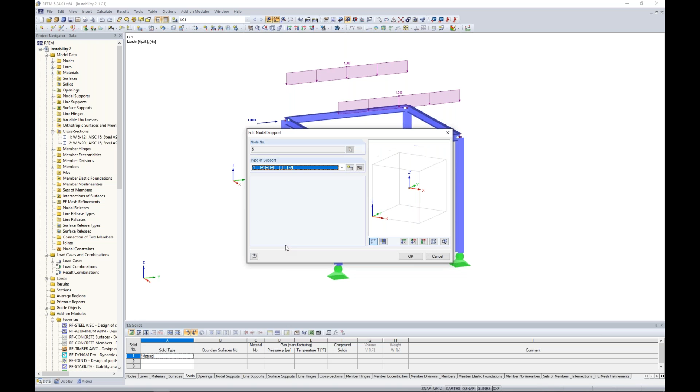You'll see down here at the bottom, we have these nodal supports. So these pin type supports are defined here within this dialog box, and you can see we have 6 degrees of freedom, 3 in translation, 3 in rotation. Now notice for this pin support, I restrained the translation according to the global X, Y, and Z axes, which we can see these axes here. But I've also restrained the rotation about the global Z axis, so this just doesn't allow that column to freely rotate about its own axis for torsion, for example. So we restrain that here as well.

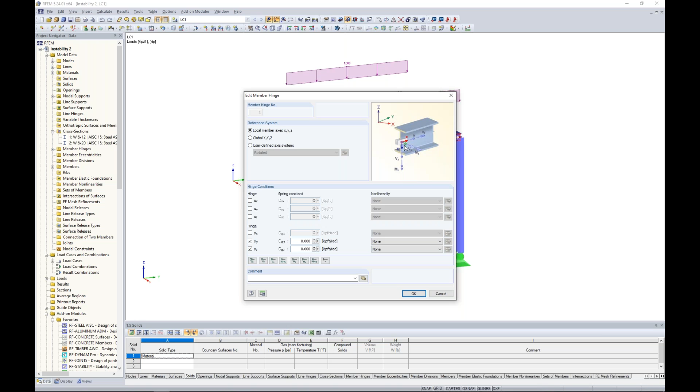Now, when I look at my beams at the top here, you'll notice that these are just typical beam type structures, but they are defined with a member hinge. As you'll notice here, I have released the rotation about the local Y and Z axes, denoted by lowercase x, y, and z, and we can relate it to this picture. But I have not released rotation about that local X axis, so that's going to prevent this member from freely rotating about its own axis with this pin member end release. Taking a look at our simple loads that we've applied, distributed loads up here on my front and rear beam, and then a couple of point loads to essentially apply a lateral load to this structure.

So this is under a particular load case here, and when we go to run this load case according to just a simple linear analysis, we're presented here with our first instability. I'd like to encourage you that when instabilities occur, especially within RFEM, really read this text that's given to you. We really do our best to point you in the direction the instability can be resolved.

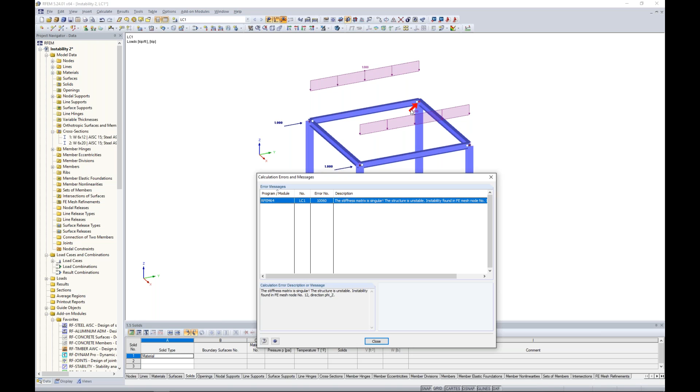So when we read this, we see that the structure is unstable. The instability is found in FE mesh node number 12. If I drag this down, we can see that red arrow kind of pointing to where that instability could potentially occur. Not always will this red arrow be helpful in troubleshooting exactly where the issue is, but often it can be used. And the instability is occurring in direction phi z.

So this is rotation about my global z axis. I can close out of this dialog box, and we might be thinking, okay, well, we've restrained these pinned supports down here to restrain the rotation about the global z-axis, so that couldn't be an issue. My member end releases are defined okay. So we might be thinking to ourselves, okay, well, maybe there's a modeling issue.

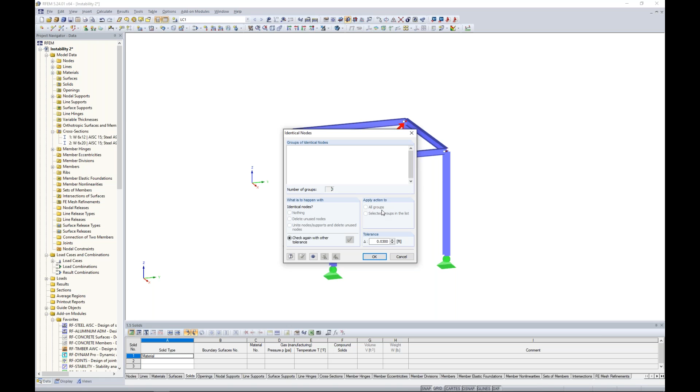Under tools, we can go to model check, and you'll notice we have a few features here to help us troubleshoot potential modeling issues such as identical nodes, overlapping members. If we take a look at identical nodes, we can set a tolerance and the program will actually list the groups of identical nodes here. But you can see for today's example, that's really not an issue.

So if I've exhausted all of my possibilities trying to troubleshoot just graphically looking at the model, this is where we want to utilize our add-on module RF Stability. Over in the left, the project navigator, I can launch this add-on module. What this allows me to do is to run a general eigenvalue analysis on this structure for general stability design. And I'm going to specify the lowest number of eigenvalues: 4.

That's just the default. Now, the eigenvalue analysis is linear by default, but we also can run a nonlinear analysis if we choose to. But here's the problem. When we try and import the axial forces here from load case number 1, and we click calculate, the program gives us a warning saying that the results are not available. The reason why is because we cannot run a general static analysis in RFEM with this load case. So there's no way that we can run an eigenvalue analysis here.

Well, this is where we would want to activate this checkbox down at the bottom where we can determine the eigenvector for an unstable model so the cause of the instability can be checked graphically. Notice this is now grayed out. We're not utilizing this load case or combination. So now when I click calculate, we're presented with these results tables, eigenvectors by node and eigenvectors by member. But really what's most helpful is if we just immediately jump to the graphics view.

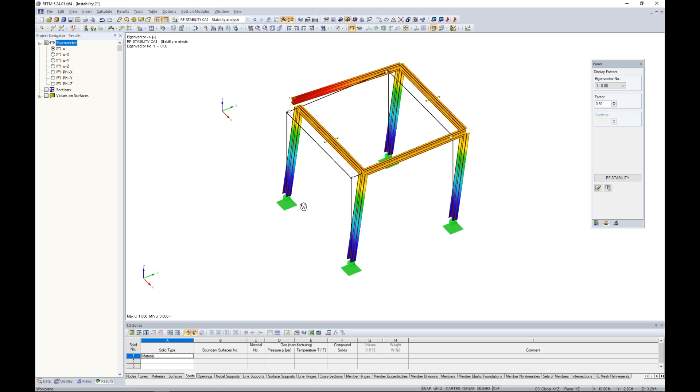And these are going to be my results from RF Stability, running that unstable model. Maybe I turn this to wireframe view here. And when I rotate the model around, I think we can clearly see what the issue is. I can even show animation here of RF Stability. We see that this member is not connected to the rest of the structure, so it's free to move about that global z-axis.

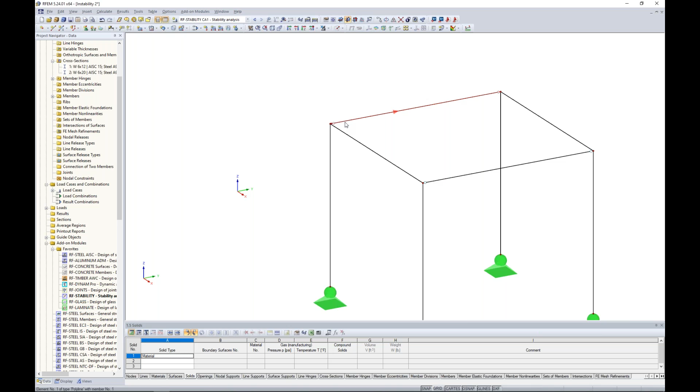So what we'll do is to turn off the results here. And if we zoom in quite a bit, well, sure enough, these two nodes aren't connected. And we might be asking ourselves, well, at what point is the program going to automatically mesh these two node points together? And that does exist within the model. Under Calculate FE Mesh Settings, there's an epsilon value here.

And this epsilon value, if we go to full precision, is set at something pretty small, 0.003 feet. So this is the default setting, and you certainly can increase this, but you really need to be careful because if you set this to something too big, you're going to begin to merge nodes together during the calculation that really aren't meant to be merged. So we'll leave this as default because clearly this distance is much greater than 0.003 feet, and all we need to do here is just grab this node and snap it to that column.

Okay, so hopefully we've alleviated this instability. What we would do now is jump back to load case 1, remember with those same applied loads, and we'll begin to run the calculation.

So I run the calculation, and sure enough, I have another instability. Now the instability is found in FE mesh node number 83, and I can see the red arrow pointing here.

So this might be a situation where this arrow's along the member length, not really much that can be going on there. So maybe it's not so helpful in this situation, but it is in the direction Y. That's the error message given to us - translation direction Y.

So again, I've troubleshooted this model looking at it graphically. I don't know the reason for this instability.

So we jump back to RF Stability. And once again, we have to keep this option checked because we are not able to solve this simple load case back in RFEM.

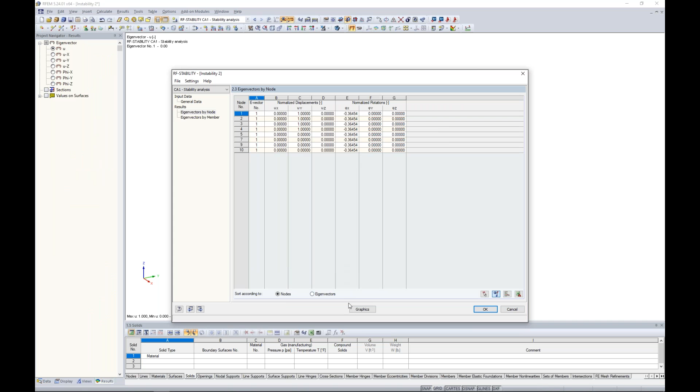So we calculate it again here, just like what we previously saw with that unconnected node. We take a look at our graphics, and realistically, we can see what the issue is here.

We have all of these nodal pin supports defined down here at the bottom. We have the moment release for our two beams at the top. So we have all these pin connections, but we have no lateral stability to this structure.

So you can see RF Stability is telling us, well, clearly the entire structure is going to fail. We apply this lateral load, and it's just really going to hinge to the right side here.

So how do we alleviate this? Well, we would just need to add in some lateral bracing. So we can go in to draw a new single member, and we access our cross-section library, and we'll choose a single angle here.

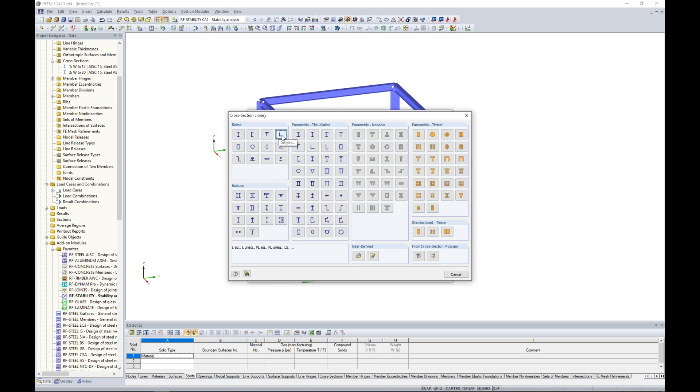Now, utilizing my filters on the left, we can choose a single angle of 3.5 by 3.5 by 3/8 from the AISC.

Maybe we want to create a new material here, so we access our material library. Again, utilizing the filters on the left, we can choose steel A36 from the AISC standard. I click OK, and the member type here would be set to tension only.

So the benefit of this tension only member is that when this member experiences compression, it will be completely taken out of the model. But in a subsequent iteration, if tension is reintroduced into the member, it will be reactivated.

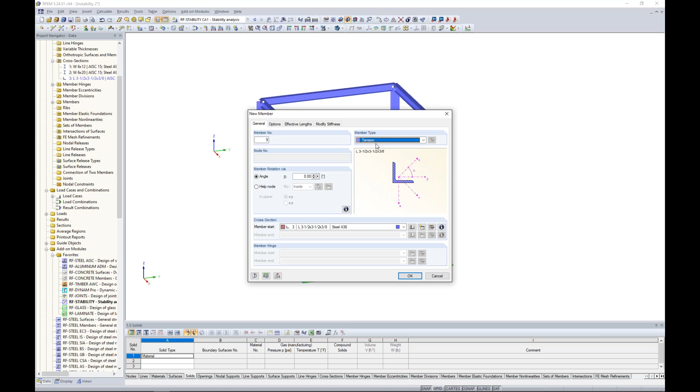And this is because RFEM is a nonlinear analysis program, so it can activate and deactivate this member all within the same calculation. So I click OK, and what I'd like to do here is snap from the bottom point to the top point here.

And now our hope is that we go back to this load case and we once again try to run the calculation, and sure enough, we are presented here with our results.

So hopefully some troubleshooting here on just basic instabilities, utilizing that add-on module RF Stability to help us.

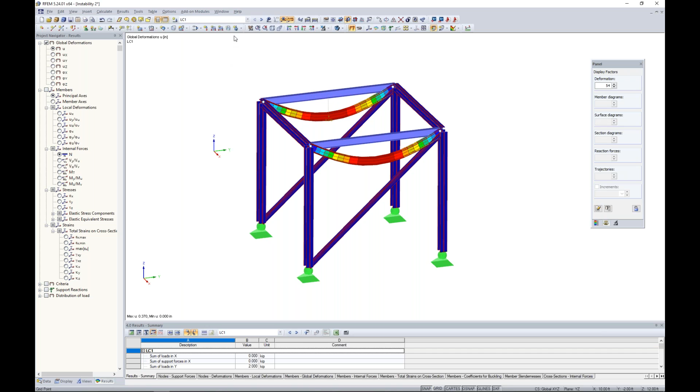So going to our next structure here, an example, definitely a more complex system. This is a previous structure I took from a webinar. If I change the display here, it will be quite clear - a timber structure with curved glulam members.

I did the design according to the NDS standard, so you can certainly refer to our website or YouTube channel if you're interested in more of this. But as we can see, typical glulam beam members here, and if I change my view to the member type...

I've defined truss elements in between these larger beams, and the truss just means that we're going to apply a moment end release at either end here.

Then I have some tension only members defined here with my X bracing, and these are just going to be cable elements. Then of course at the front and rear of the structure, we just have these small columns defined here.

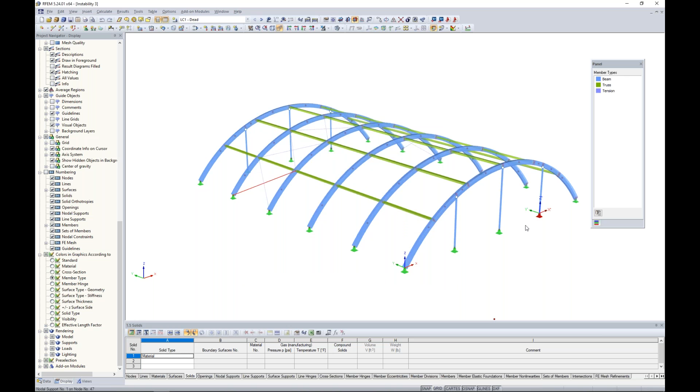So looking at my load cases, I have a dead load applied here. You can see uniform load applied across the top of my members. We have point loads applied to the top of the columns, and we also have a pre-stress applied to these cable elements.

Looking at my next load case, we have a balanced snow load according to the ASCE 7, and then load case number 3, an unbalanced snow load.

Well, when I combine all of these into my load combination, you can see here load combination number 2 - it's combining those dead loads along with the balanced snow load. And I'd like to run this calculation here.

So we will run the calculation. I click OK, and the program will run through this nonlinear analysis, and we are presented with yet again another instability. But notice that my text looks a little bit different this time. It says the model's unstable. The instability is found in FE mesh node number 94, so we can see exactly where that's pointing to.

But this time the program tells me, yes, it's in the direction phi X, so rotation about the global x-axis, but the specified load is greater than the critical load. It goes on to tell us to utilize RF stability to help troubleshoot here.

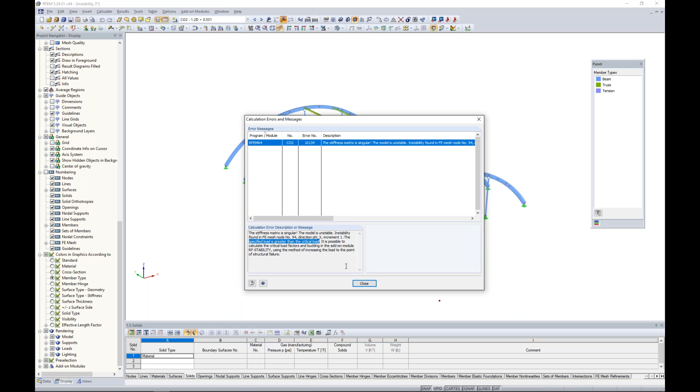So how would I approach this? Well, when we're seeing issues related to critical loads, the first thing to do is jump up to our load combinations. By default, all load combinations are run according to a second order analysis. Let's just change this to a first order analysis, click OK, and try to rerun the calculation. Now, if you cannot run according to a first order analysis, the first thing we should be thinking is we probably have a modeling mistake somewhere.

But in this instance, the program runs okay. And the other thing to check is, do we have any crazy deflections? If you see things just flying off the page, you know there's probably some type of modeling error when the deflection according to a first order analysis is pretty large. But in our case, if I decrease this deformation factor and look at our total, it's 0.4 inches. So really nothing too wild going on here.

So why can we not solve according to a second order analysis? Well, this is where we would jump to RF stability once again. Now, the difference here is that I no longer need to utilize this checkbox, but rather I can select load combination 2 from my dropdown, because remember, we were able to get it to solve in RFEM according to a first order analysis.

So we run a linear eigenvalue analysis, and what will be presented here is our critical load factors for our 4 different buckling modes. Now, dragging this down and taking a look at my 4 different eigenvalues, I think we can see clearly here what the issue is. It's these slender columns at the front and at the rear of the structure.

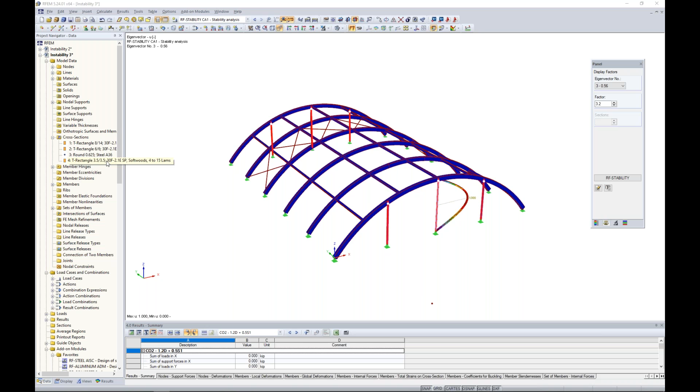Well, we can jump to our graphics view, and if we're curious to see those different buckling mode shapes in a little bit more detail, we can do so within our color panel. So I'm going to go back to the project navigator under my data tab to take a look at my cross sections. My slender columns here are very slender - I can double click on them and you can see they're only 3.5 inches by 3.5 inches. So maybe we edit this and instead use 5 inches by 5 inches, same material, no modifications needed there. Now we're going to see slightly higher stiffness with these increased member sizes.

So then what we'd like to do is go back to our load combinations. Load combination number 2, we change this back to a second order analysis, because the hope is that this now solves according to not only a first order analysis, but a second order analysis as well. And sure enough, we are able to get results here, and we can see that our total deformation is only 0.4 inches. So everything looks pretty good there.

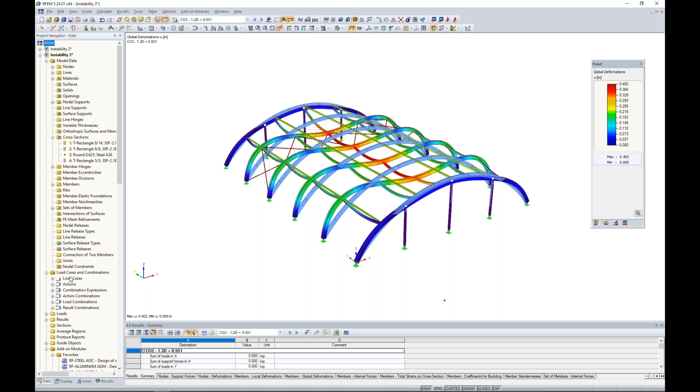And we might be curious to see, well, what does RF stability look like once we've increased these member sizes? We're still importing load combination number 2, but remember now this is according to a second order analysis - that's fine because it solves back in RFEM. And here we're presented with critical load factors of 2.2.

So it looks like our initial buckling mode shapes here for this structure would still be related to these slender columns, but now the structure can handle 220% of the loads from load combination 2 before we're going to see any type of failure behavior related to buckling such as this. So again, incredibly useful to utilize this add-on module RF Stability here.

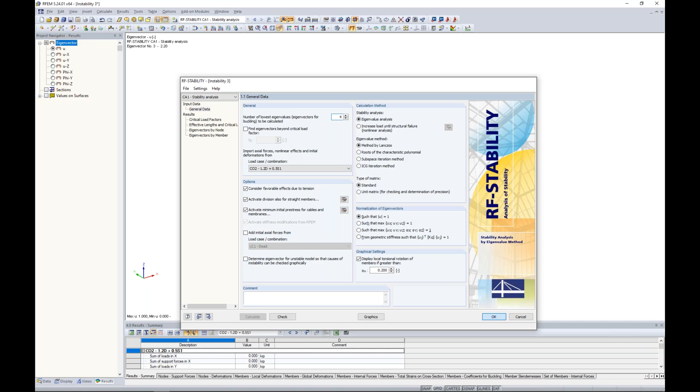Okay, so jumping to the last instability example, you can see that the first two examples are related to members and 1D elements such as beams, columns, and so on. But instabilities can also happen with surfaces. So once again, this was a previous model I took from a two-part webinar series with a little bit more information on plate and shell modeling within RFEM. And we have a typical tank type structure here.

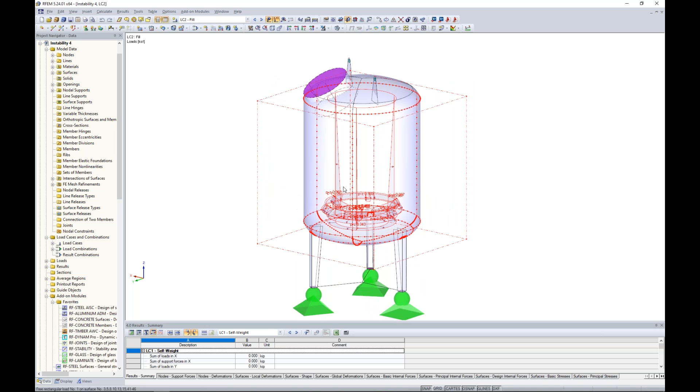So when I take a look at my applied loads, we have our first load case, which is just self-weight, so no additional loads are shown here. Then we have our fill load, which is going to be an internal load pushing out on the structure walls here. And we have a wind load, which includes an uplift from the bottom and also a lateral load coming from the left with a suction force on the right-hand side. So taking a look at my load combination where I've applied all three of these load cases together, we'd like to begin our first analysis.

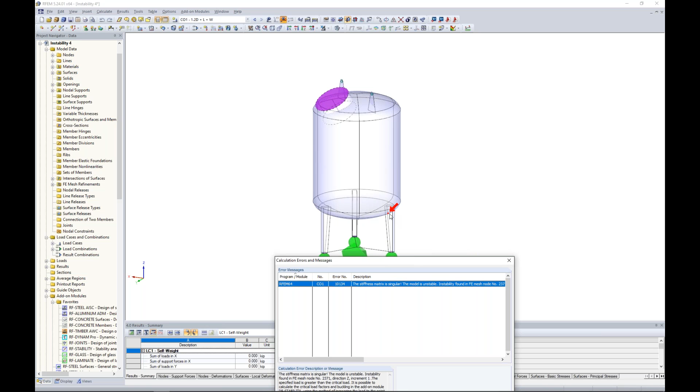So I'm going to start the calculation here, and similar to what we've seen previously, we get an instability. So once again, let's try and read this information to give us more details about what could possibly be going on. We have an instability in FE mesh node 2371. So I look here, okay, well, it looks to be at the top of this leg, the bottom of the actual body of the tank. This time it's in the Z direction. So we'll have to look into that further, but we still get that same error that the specified load is greater than the critical load.

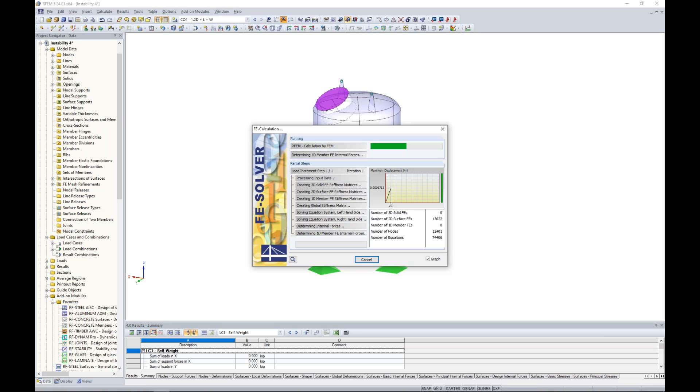So once again, I'm going to take the exact same process that we just saw for our member elements, but it also can be applied to surfaces. So we go into our load cases and combinations, and under calculation parameters, instead of running according to a second order analysis, we change this to a first order analysis, and it's our hope now that we're able to see the calculation run. And again, if we're not able to, then let's begin checking for duplicate members, duplicate nodes, unconnected nodes, maybe we have the wrong units defined for our loads. So many different scenarios here. But in this particular case, the model solves great for a first order analysis.

If I decrease this deformation here, we see the total deformation is only 0.05 inches. So relatively nothing going on here.

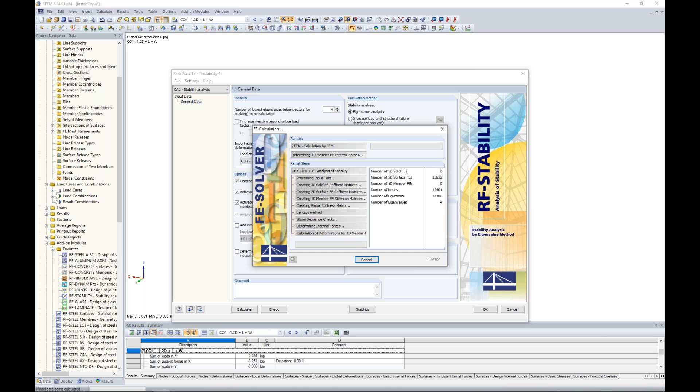So we go back to our trusted RF Stability, and we are going to import load combination number 1, because remember, we do have the ability to solve for that back in RFEM, so we do not need to utilize this option down here at the bottom. We click calculate here, and notice this will take a split second longer than what we saw with our members, because we've introduced many more FE mesh points into the model than what we previously had. But eventually we are going to be presented with our results here, including the critical load factor.

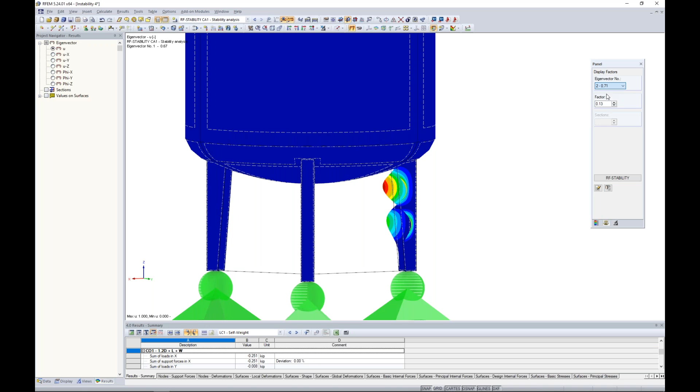So when I move this down here, I think it's quite apparent what exactly the issue is. It looks to be buckling of these leg elements here. And again, we're seeing values less than 1.0, so the program's telling us we can only apply 67% of the loads from load combination 1 before we're going to see a failure such as this one. So going back to the graphics view, maybe we turn this to wireframe view to view this in a little bit more detail and more clearly. Again, we can scroll through these different mode shapes here, and again, they're all related to this leg element here.

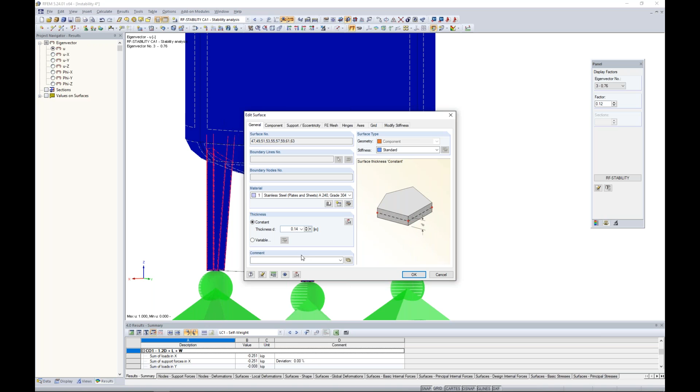So what I can do is highlight all of these elements, and I can right click to edit the surface, and we'll notice that our thickness is only 0.04 inches. So this is probably not sufficient in this case. We definitely need to increase this. So let us try 0.14 inches instead. I click OK.

So again, we jump back to our load combination and change it back to a second order analysis, because once again, it's our hope that this model will not only solve for first order, but of course will solve for second order. And sure enough, we're presented with our results now. So just by increasing the thickness of those legs, we've alleviated the buckling issues that were taking place.

So again, RF-STABILITY can be used not only for member elements, but we can really troubleshoot the stability of surface elements as well. All right, so we will move on to the next topic. That's quite a bit on instabilities, but hopefully you can learn something here. Definitely take a look at the text given in the error message and use RF-STABILITY to overcome those issues.

So I mentioned in the PowerPoint a very common question: what size should my FE mesh be for my surface elements in order to give me accurate results? That's always a good question, and it's not so easy to answer for every single model because this really depends. You'll notice here that I have 5 different surfaces, and they're actually all identical.

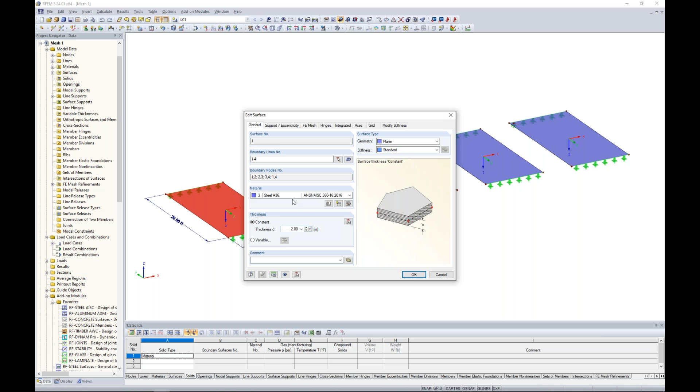If I double click on one of these, it's just a steel A36 material, 2 inches thick. If we take a look at our support conditions, we have line supports defined on either side: a pin type support, restraint with translation on one side, and a roller type support on the other. For our applied loads in this initial load case, just a 0.1 distributed load, 0.1 kips per square foot on every surface.

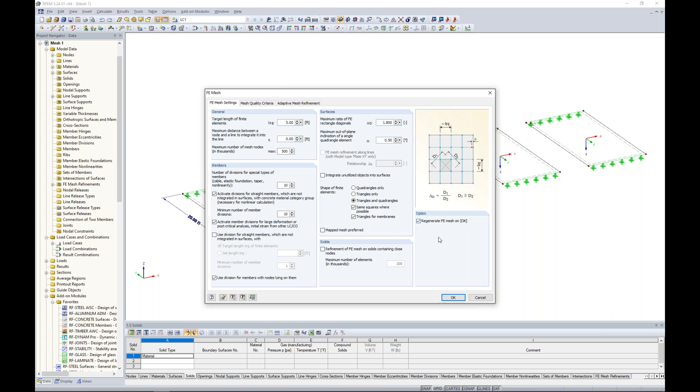So if we turn this to wireframe view, let's begin with our global FE mesh settings. Under calculate FE mesh settings, we can set this global mesh, and you can see I've set mine to 5 feet. So when I click regenerate FE mesh, I click OK. Let's take a look at our first surface here. This is going to abide by that global FE mesh of 5 feet, and you'll notice a very coarse mesh.

We only have 2 elements across the width, and I can tell you this is definitely not ideal. The only place that we're getting results within the program after we run the analysis is at every FE mesh point. Definitely not adequate, much too coarse.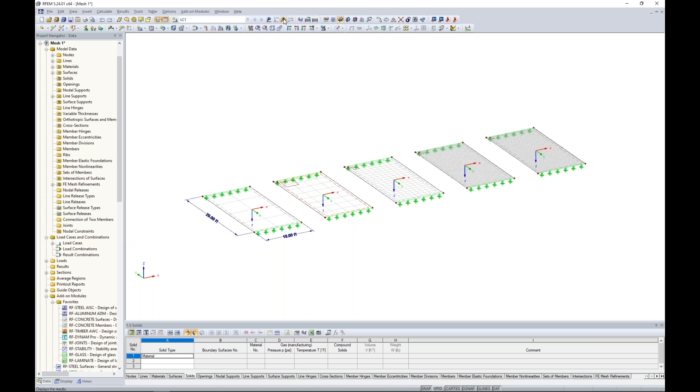As we move on down the line, you'll notice that I've added these FE mesh refinements. You can add an FE mesh refinement about any element by highlighting it, right clicking, and you'll see FE mesh refinement. In this case, I set the FE mesh refinement to 2.5 feet, so about half of what we're seeing from this adjacent surface. I continued by adding an additional FE mesh refinement of 1 foot. My fourth surface has an even smaller FE mesh refinement, 0.25, so about 3 inches. And finally, we have this very refined FE mesh at 0.1 feet, a little over 1 inch. So it might be interesting to compare results for these distributed loads.

So we're going to run the analysis here. And let's take a look at, I'll turn off my sections here, the initial deformation. Just primarily looking at it, nothing too drastically different here. I'm sure we would get some different values, but I think the biggest telling difference is to take a look at the internal forces. Let's begin with our MY forces.

I've set my contours according to every FE element, and you can see that bending along the local y-axis of the surface, so this is in the length direction, is drastically different as we move down this line. As you can see, and I've already mentioned, this coarse mesh is much too big. We're not going to gain accurate results here. When we take a look at the MY forces, same concept. Comparison of this first surface versus these last couple is very different.

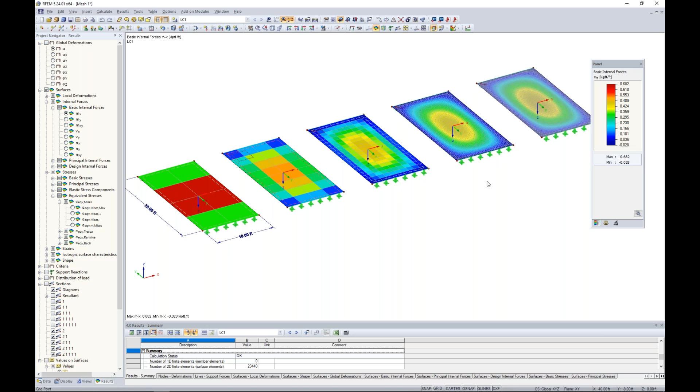Now we can compare section cuts as well. I'll turn on these sections and turn off my ISO band so this is easier for you to see. I made this cut right down the center of these surfaces, and under my display tab, let me also turn on how those cuts were made. I'm currently looking at the MY force, again along the length, and you can see how the diagram of this section cut changes. We're definitely getting a much more realistic view as we move into the finer meshes.

The other thing to pay attention to are the values. The max value here moves from 4.583, 4.856, 4.932, but then we're getting into 4.945.

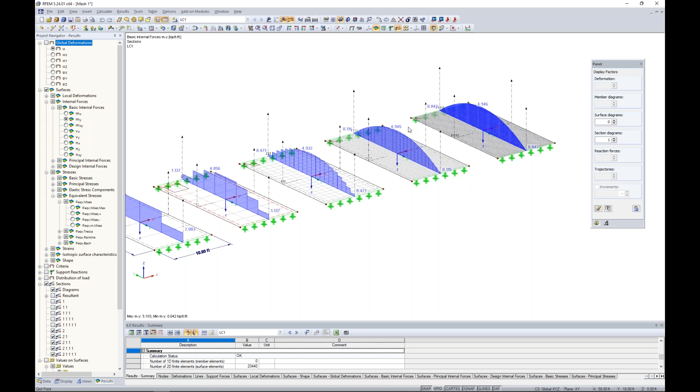At some point, our cost to benefit ratio, so to speak, shows that continually refining this FE mesh is really not drastically influencing our results. For example, these two elements here - this has about one-third the FE mesh on the left than it does on the right, but our results are only changing by 0.001. So it's finding the right balance of when to refine our FE mesh to gain accurate results, but not so much that our calculation time increases significantly.

Now we can also view the same concept with our MX forces, and I'll turn on my diagrams in the other direction of my section cuts through the surface. Same thing - you can see this diagram is definitely not what we'd like to see, but as we move down the line, we're seeing more realistic behavior. Take a look at the max bending forces: 0.479 kip feet, 0.472, 0.47 - very little difference as we increase the FE mesh. So I'd argue the second to last, or possibly the third to last, depending on your structure, is adequate for accurate results without waiting forever for your solution to run.

Now how do we check this for our own structure? Well, we can just manually refine the mesh, run the calculation, and take a look at our results. Let's rerun the calculation with a more refined mesh. Are our results drastically changing? Yes. Well, then we need to continue refining until we get to a point where the results aren't changing much, and then we can probably move forward with our static analysis.

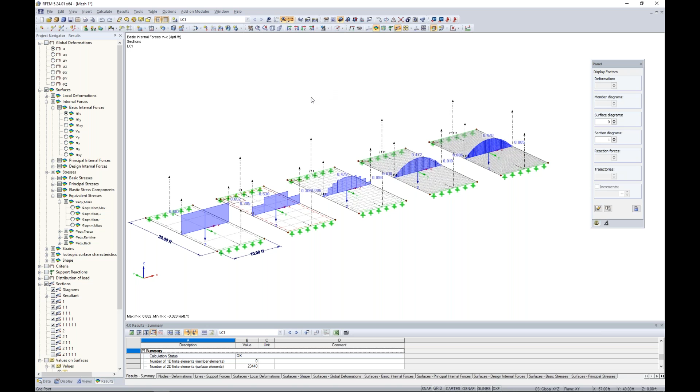So to put this practice into a real life structure, we'll jump to our next example. This is the FEA model of a connection - a beam splice here with two HSS members, utilizing a contact solid. A contact solid will allow these two plates to fail in tension where the bolts take over, but in compression we'll see full force transmission. But definitely a much smaller scale here in terms of our FE mesh.

Turning this to wireframe view, if we go to calculate FE mesh settings, typically for a new model the default mesh size is 1 foot or 12 inches. If we move forward with this 12 inches and regenerate our FE mesh, I think we can see this is absolutely not correct. There are portions of this HSS sidewall that don't even have a single FE mesh point across the width. This tells us we really need to refine this FE mesh to get multiple elements across this width to get accurate results.

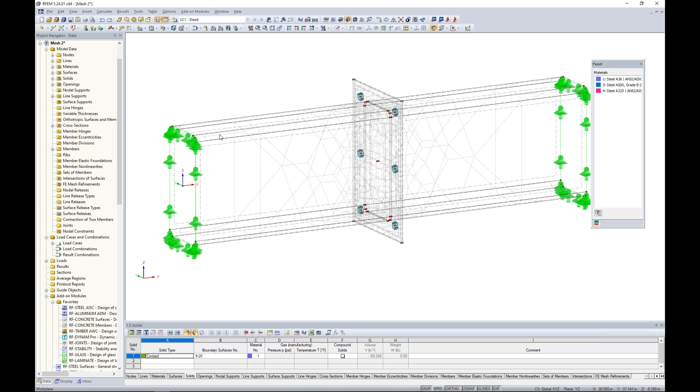So under calculate FE mesh settings, let's change this instead to 1 inch, regenerate the FE mesh, and click OK. Now you can see this looks incredibly better. The program is still intelligent enough, as you saw with the 1 foot mesh, that it will still tie together the nodes and line elements despite the large FE mesh. So we don't need to take care of any of that manually, but we definitely needed to refine the FE mesh for the surfaces out here.

Now there may be situations where we want to further refine the FE mesh, and we can utilize FE mesh refinements - we just right click on this line element and add that FE mesh refinement. So you can manually do that. Now there's a helpful tool within the program that essentially does all this manual work for us when it comes to the FE mesh. Under calculate FE mesh settings, you'll see adaptive mesh refinement. Well, what does this tool do?

We can turn it on here and select any load case or combination from our dropdown. In my case, I only have one load case defined. We set an average error tolerance, which I'll leave at 0.1%.

The program starts with a pretty coarse mesh, as you can see here. It will run the analysis, refine the FE mesh, and compare results from the previous iteration. It continues doing this until results don't change within 0.1%. So it's actually doing what I told you to do manually in the previous example, taking a look at your results. This will do it automatically for us.

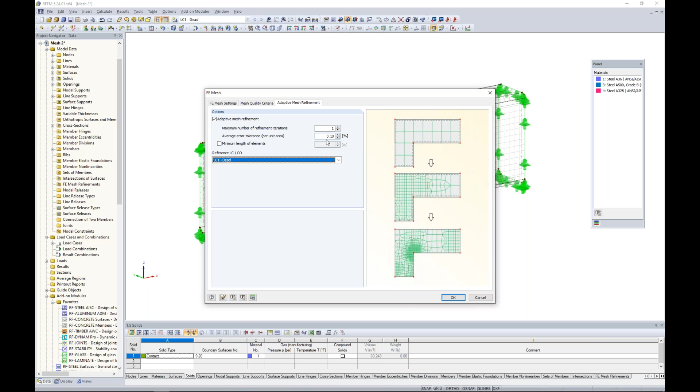So when I click OK and click calculate, generate FE mesh, it looks like it's almost running a calculation, but it's actually determining the FE mesh for us.

Once this is done calculating, what will be presented is the refined FE mesh. You can see a larger FE mesh at some of these HSS surfaces, but around our bolt openings, or these curved portions closer to our line support, we're going to see a more refined mesh. This is the ideal mesh to continue moving forward with our static analysis.

So again, you can either manually set that global mesh and add your own FE mesh refinements if you'd like more control, or you can utilize this adaptive mesh refinement within the program to have the automatic mesh set for you.

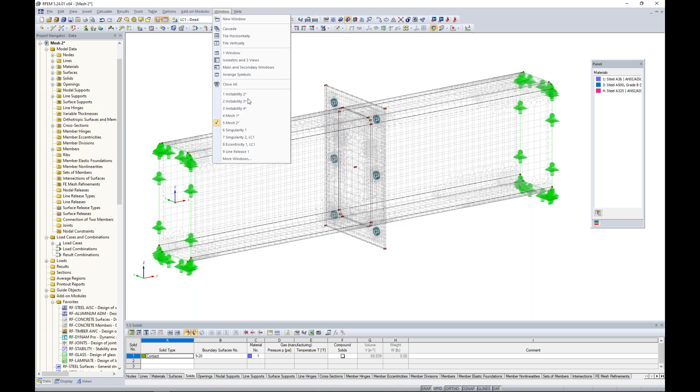This brings us into our next topic, also related to surfaces and somewhat to FE mesh: singularities. Singularities really happen in every FEA program. We experience high peak stresses and internal forces that aren't going to occur in real life, but they're inevitable in FEA software. This will be a good example of why they occur.

Looking at this concrete structure on a much larger scale, we have a 2D surface for our slab. This is 4,000 PSI concrete, with thickness set at 10 inches. We also have columns framing into this slab from underneath, and these columns are 15 inches by 15 inches. But the problem is when we turn this to wireframe view, and this is the case with any FEA software, members are represented by a one-dimensional element.

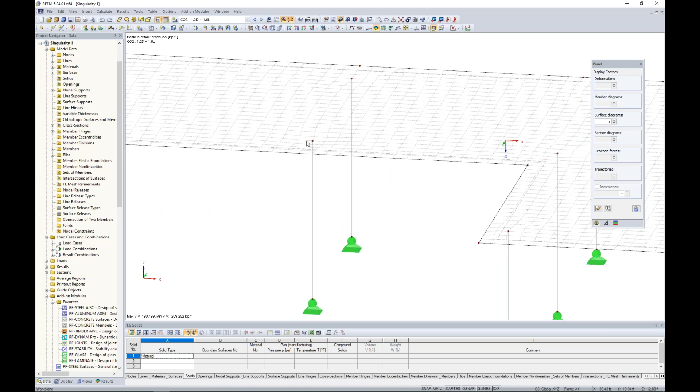It's framing into this two-dimensional surface at this single point. So all of the force transfer is taking place at this single FE mesh point, and this is a result of why we get singularities, where we don't have real load distribution.

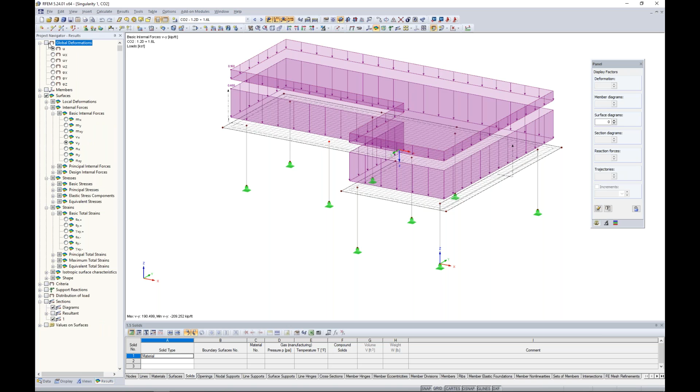For this example, I've applied a couple gravity loads for dead load and live load. If we run the analysis, which I've already done, and take a look at our results, we'll turn on our ISO bands and turn off our loads. The initial deflection, nothing too strange here.

But let's take a look at the internal forces for our slab element. We'll turn this on and look at MX. Initially, MX looks okay. We're seeing some positive bending moment in between these column supports, but then over the columns we're seeing extremely high negative bending moments. There will still be some negative bending, but these look pretty high at these locations.

MY, same concept: positive bending between where these columns are spanning, but very high negative bending moments where it frames into these single 1D member elements. And even more so can be said about the shear forces.

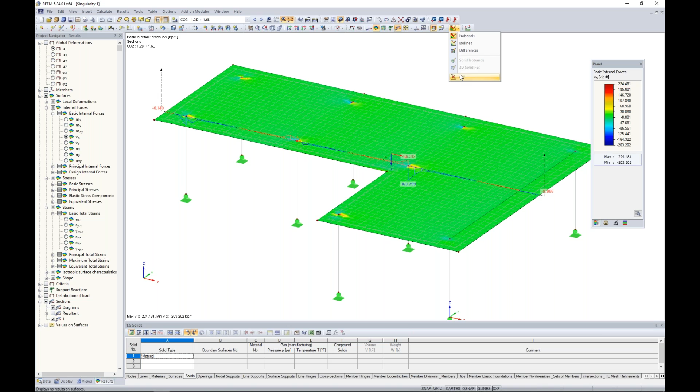We fully expect shear forces to be higher at these column locations, but I've also made a section cut through my structure that I'll turn on, and turn off my ISO bands. If we look at this section cut, these shear forces are very high, from negative 66 kips up to 163 kips, all at this single point location. There's got to be a better way to distribute the forces over that entire portion where the column frames in, because in real life it's not represented by this single line element.

Well, this is where we'd like to add what's called an average region. Under the project navigator, we can find average regions listed here. I can right click and choose new average region. It's exactly as it sounds. We're going to average out the internal forces over a set width and length, and then this will be presented to us so that we can overcome these high singularity forces.

Actually, one other thing I forgot before I do this, let's jump into this in just a minute. I also wanted to preface that before you place in those average regions, let's think about the FE mesh. What I'd also like to do here is to refine the FE mesh around these singularity locations. I think it's best to isolate these high peak forces into an even smaller area, and we do so with an FE mesh refinement.

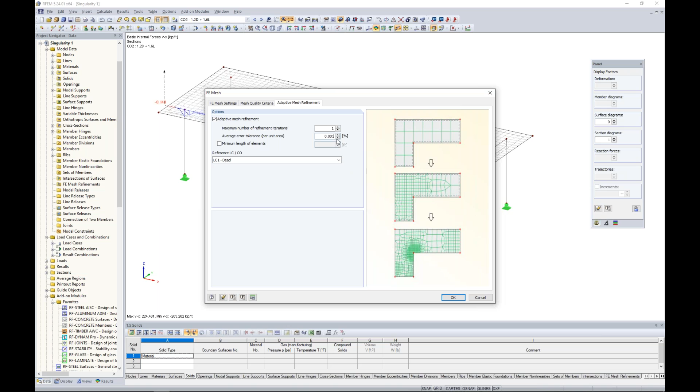So we can right click on that node and add in a new FE mesh refinement by creating a new refinement type. But remember, we can also utilize, under calculate, FE mesh settings, the adaptive mesh refinement once again, just to get the ideal mesh refinement. In this case, I'm going to set this percentage to something much lower, and I need to do so in order to see some refinements around these columns and such. So under calculate, generate FE mesh.

Let's take a look here. Here's the initial coarse mesh in the background, and eventually we have these nice FE mesh refinements, especially around our reentrant corners and our columns. So let's rerun this calculation.

I just want to show you that what we'll see here is those high peak stresses and internal forces are even higher. We're up to almost 770 kips. That is also what's going to happen when we refine the FE mesh. We continue refining more and more and more, and we're just going to see those internal forces and those peaks go up more and more. But that's okay. The whole intent was to isolate that to a smaller area, because now let's jump back to the average region.

We right click on the average region to create a new definition type. As I was saying, exactly as it sounds, it's going to average out these internal forces over a set dimension. Now we can choose the surface we'd like to apply it to, so it'll just be surface number 1, only one surface here. I'm going to place the average region at the top of this column, so I graphically selected it. We choose the shape, so it can be a rectangle here.

We choose the dimensions. Now, we might be asking ourselves, what's the correct dimension for an average region? This all depends on your model. It's definitely up to the user's discretion on how big to set this average region. In my case, I'm going to set this to 1.5 feet by 1.5 feet. If you set it to something too big, we might not be conservatively designing this location around this column. If you set it to something too small, maybe we're not alleviating the singularity. We also check all 4 of these options here. This just means it's going to average out the internal forces in all 4 directions.

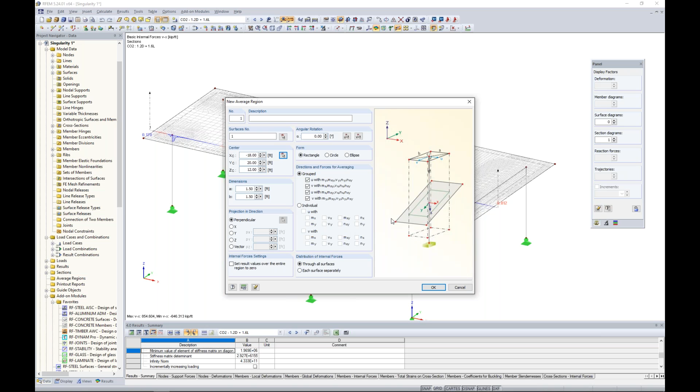Now when I click OK, you'll notice immediately that the high peak force is gone because we're averaging it out over this entire area shown with that blue symbol. I can take this average region, hold down my control key, and drag and drop it to my next column location. You'll notice that peak's now gone. Let's continue to do so with this third column, and now we're seeing those high peak stresses are eliminated.

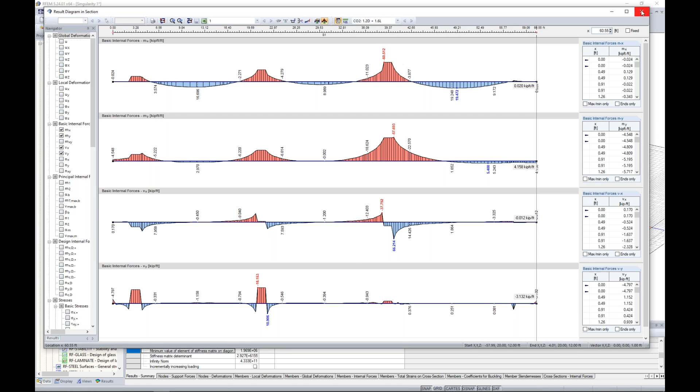Not entirely, because we do want to see some shear, of course, at these locations. If we right click along this section cut to view our results diagram, this is just going to give us a little bit more detail along the length here. I'm going to turn on MX, MY, VX, VY, and we can clearly see where that average region was applied. You can see it's flattened out along these internal force diagrams. So average regions can definitely be helpful in overcoming these singularities. They can also be applied in the design add-on modules such as RF-CONCRETE Surfaces, where we design the reinforcement for this element here.

Well, these average regions can also be considered directly within the add-on modules.

Moving on to our next example, also dealing with singularities, there are situations where average regions don't help. For this case, we have a shear wall or gravity loading wall with 4,000 psi concrete, 6 inches thick, with a simple gravity load applied as a distributed load at the top. I've also applied a couple columns framing into the bottom, quite compact in one direction at 2 feet by 6 inches. But regardless of the column dimensions, when we turn to wireframe view, these members are represented by single line elements framing into one tiny FE mesh point.

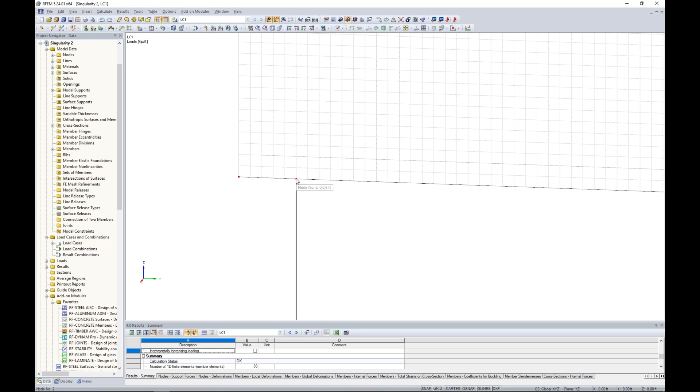When we look at the results from this load case, currently viewing deformations, we zoom in and this definitely is not ideal. We know this column has a width of almost 2 feet, so we wouldn't expect deflection such as this. If we look at internal forces, specifically NY forces for compression and tension in the wall, we have extremely high peak forces here - those singularities. We're seeing compression here at 454 kips, which is definitely not ideal.

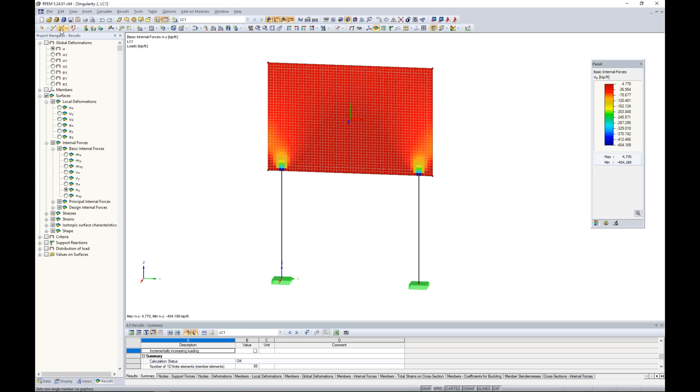So how can we see better load distribution over this area? This would be a situation where average regions could be helpful, but I think there's a better approach: applying a rigid element for load distribution. We'll draw a new member, and under member type, choose rigid. A rigid element doesn't let you choose a cross section or material because it's just a very high stiffness element. We'll click OK.

It's asking me to clear my results. I'm going to zoom in here and snap from the top of my column 1 foot to the left, and snap from the center of the column 1 foot to the right. So there's that rigid element, representing the full 2 foot width of that column. If we turn to a rendered view, this is what we're helping with for load distribution. I'll take these two rigid elements, hold down my control key, and after they're selected, drag and drop to copy them to the other side.

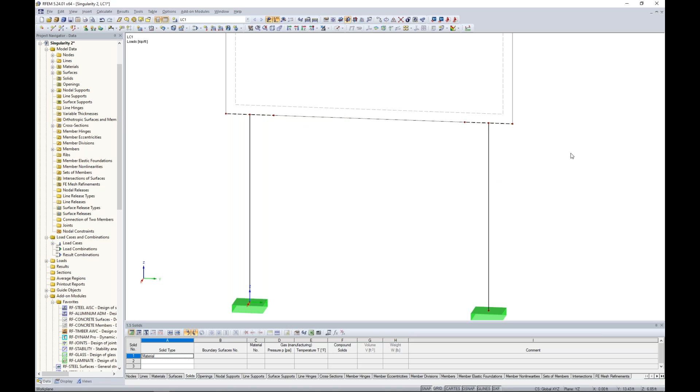Let's rerun this same calculation to see how results vary. Looking at global deformations, this looks much better - we have a straight deformation line at the top of the column due to those rigid links, yet we see downward deflection spanning between the columns. Jumping back to internal forces, particularly tension and compression, we now see high tension forces at the bottom and compression forces more towards the top. This is exactly what we'd expect.

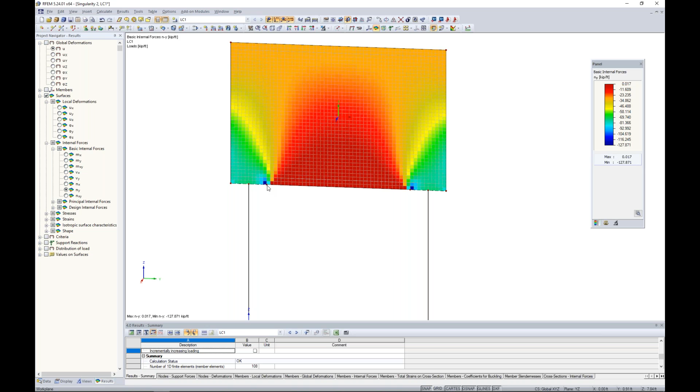Previously, we had singularity points that were overtaking all the internal forces. Now we might still have a slight singularity where this rigid link ends, and this could be where we use an average region to help distribute that load a little further. But overall, this gives us much better results than what we saw previously without those rigid elements.

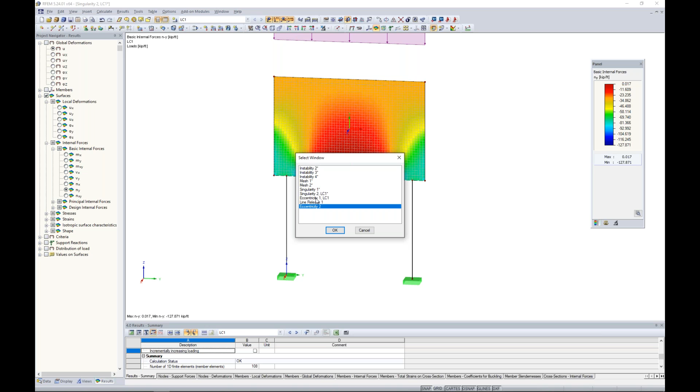Moving on to our second to last topic, we'll take a look at eccentricities, jumping to this model here. Very simple application with simply supported members, but I want to take time to discuss member eccentricities and member offsets, because this topic comes up over and over again. It must be remembered that finite element analysis software is not a BIM software. BIM is used to create drawings to give to the contractor showing exactly how members are framing into each other.

When we're talking about finite element analysis software, this is truly what it sounds like - it's for the analysis, for the engineer. So it's not our goal to make sure every element lines up perfectly with every other adjacent element. I'd like to take a minute to talk about when eccentricities can be helpful, but also when they can cause unwanted behavior within the program.

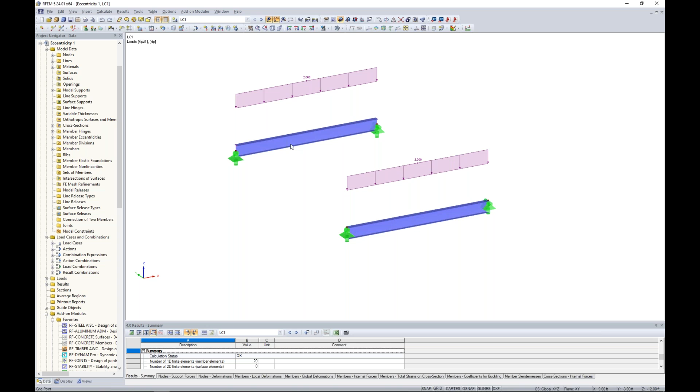Starting off with a simple application here, a distributed load over these simply supported members. You'll notice that first element here, I turn this to wireframe view - everything's just framing into it at the center line. Well, the second element here, let me turn off my nodal supports.

What you'll see is that I've actually added in an eccentricity, so under the options tab, I manually set this to drop the top of steel to where that nodal support is, in the global Z direction. So when I turn this into wireframe view, we have these rigid elements dropped down at those nodal supports. Now, we're not truly adding rigid links along the member length - it's actually taken into account with the stiffness matrix, but it's easy to think of it as imagining these rigid elements dropping this member down all along the length.

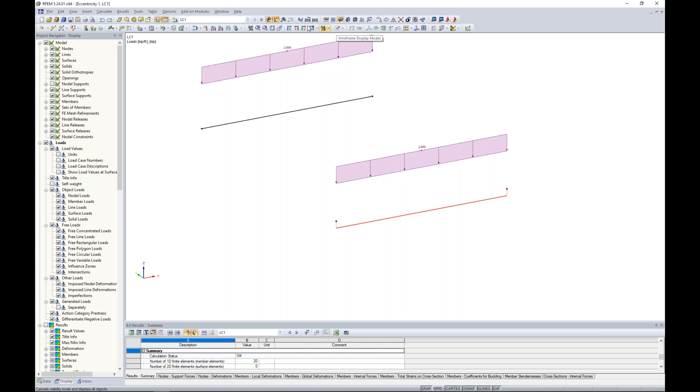We might think that's harmless, so we go run our analysis here, both with the same distributed loads, and take a look at the results. We'll immediately start off with the moment diagram. For a simply supported beam, our first example is exactly as we'd expect - peak moment right here at the center.

But as we transition into those nodal supports, which are a pin-roller type situation, we expect no moment. Well, by introducing this eccentricity to drop the top of steel down to where our nodal support is, we now have a negative bending moment here due to those rigid elements at the end. Our peak moment here in the center is almost half of what we're seeing with our original beam element. So definitely not ideal when we're dropping that element down, because we're going to get these unwanted moments at the ends - we're not getting the full moment at midspan.

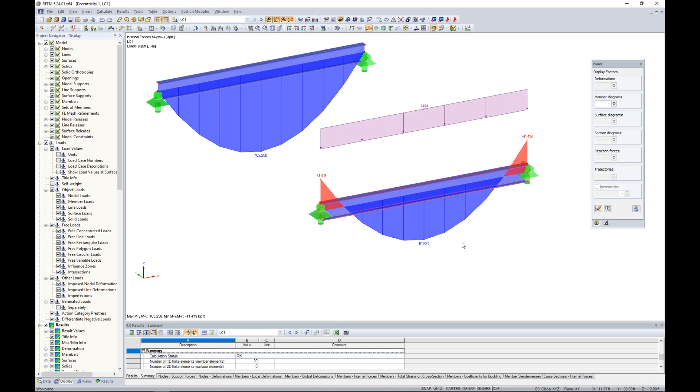So this is definitely a scenario where you really need to think to yourself: okay, why am I dropping this element down with this eccentricity? Is it really necessary with this finite element software?

Moving on to our next example right next to it, we'll take a look at a different type of system - just a simple 2D frame here, and you can see I've restrained the top out of plane, with chevron bracing using single angles. Turning this to wireframe view, my first example has everything framing in nicely at the center lines just by default.

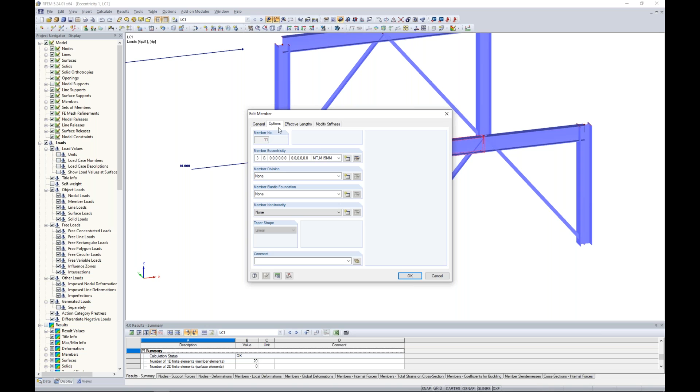Well, when I take a look at my example in front of it, what I've done - I'll turn off those nodal supports here - is I wanted to drop the top of this member down to the top of the column. So we've added in that eccentricity, which you can see under my eccentricity options. I took advantage of this relative offset - I took the top of the member and offset it from member number 15, which is the column. The advantage of using these relative offsets is that when the member size changes, the eccentricity is automatically updated, so I don't need to manually adjust those.

But point being, we could have even taken this a step further to move the eccentricity from the axial offset as well. When we turn this to wireframe view, we can see this member drop down below with those rigid type elements, again being taken into consideration with the stiffness matrix.

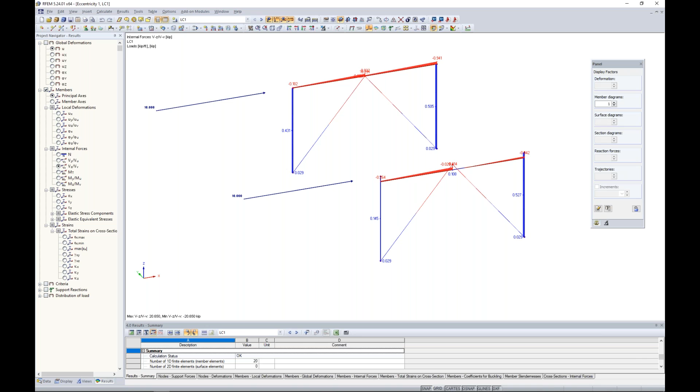A lateral load is applied here. So we run this analysis, and when we take a look at our results, pretty much everything looks to be fairly the same. We're taking a look at our axial forces, and maybe our shear forces as well.

But taking a look at the bending moment, the strong axis bending moment, let me create a visibility for just these two upper beams here. Well, you'll notice the drastic difference with the strong axis bending. In my first example, we transition here from a positive moment, 0 moment at the midspan, into a negative moment.

Quite a different story when we've taken into consideration that eccentricity. So we have a huge jump in the moment where those chevron braces are framing in. And we know that this really just is not ideal behavior. So this is definitely, again, a scenario where it must be considered, okay, do we really need to consider these member eccentricities and offsets, or is it doing us more harm than good?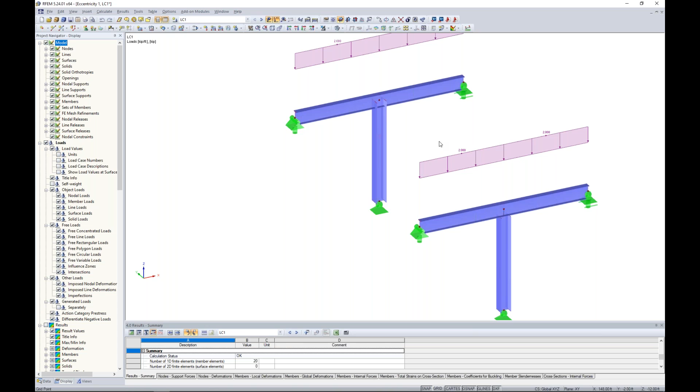So moving on to our final example in this particular model. We'll cancel our visibility mode. Let me once again turn on my nodal supports. We'll move over to the right here. Just a T-type frame. And with this system here, let's assume that we have these beams framing over the top of this column. And once again, my first example in wireframe view, everything's framing in at the center line here.

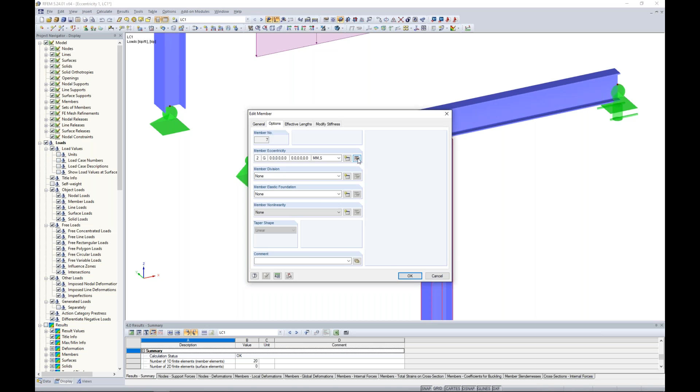So just default settings, no eccentricities. But when I look at my example here, what I've assumed is that, okay, well, if I know my beam is running along the top of this column, I'm going to offset this column so that it frames into the bottom of the member. And I did so under my eccentricity options here again. I use this option down at the bottom where I can apply an axial offset from the adjoining member.

So I've applied that, and you can see here that we have a small little link that's going to drop that member down below. So let us once again take a look at the examples, and we'll turn this to wireframe view. Let's turn off our loads. Same loads apply to either scenario. And we take a look at the bending moment. Now, only 0.1 kip feet of difference here between my model on the left and my model here out in front on the right. When we take a look at shear, again, about 0.02 kips difference between the first and the second examples.

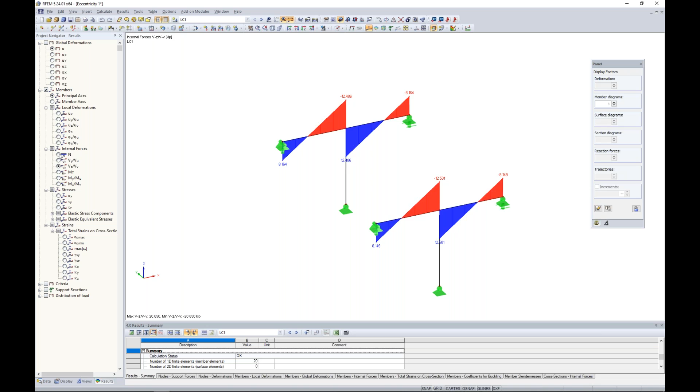Maybe we're interested in seeing our axial forces within this column. If we take a look at the axial force down at the bottom, 26.05 versus 26.01, so 0.04 kips of difference. So my point being here is that we perhaps have a huge model. We've applied all these eccentricities for our columns to drop that down to the bottom of the beams framing in above it, with very, very little influence on our results, which really doesn't make it worthwhile. So maybe not detrimental here in terms of additional forces, but really no difference. So there's no reason to apply these offsets in these situations.

So again, this isn't a BIM software. We're just truly here to do the analysis. Now the exception, well, we'll get into another exception in just a minute, but considering connection design. Of course, with connection design, you need to consider offsets and eccentricities when a beam is framing into the face of a column. That's clear. But when we're looking at overall member design, in so many scenarios, it's just really not necessary.

So jumping into an additional example here, we'll go to the second example. Now there are scenarios where we do need to consider eccentricities for the full structural system. And a perfect example of this is composite behavior. So you'll notice my initial example and system up here, I have a concrete deck. I have also my steel member, and everything just modeled with the center line. So I've applied that here. You can see those center lines just kind of lie directly within each other.

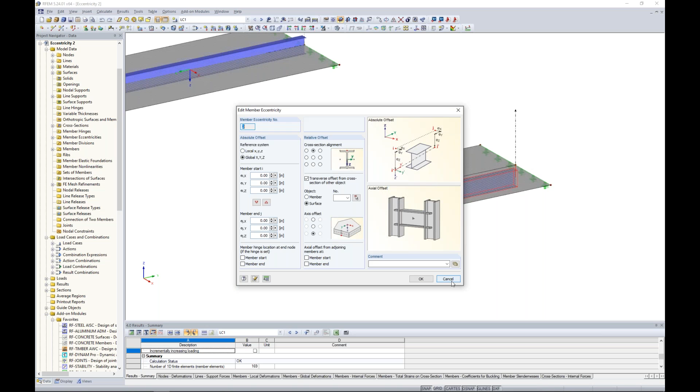So with composite behavior and comparing one system here to the other, let's take a look at our results. Just a distributed area load, looks like 2 kips per square foot. We run our analysis and take a look initially at our deflections.

The first thing to notice, and I can turn on my sections here, is that we have significantly greater deflection with this system where the elements are modeled at their center line, versus slightly less deflection here with the true offset of this member applied.

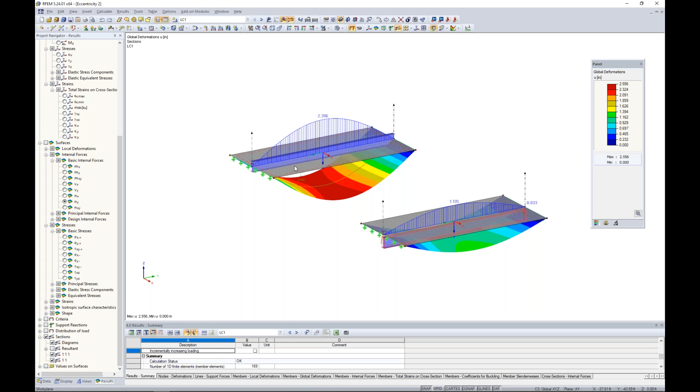Now, the entire purpose of composite behavior is so that the slab element takes the compression forces and the beam element takes the tension forces. If we turn on our surfaces and activate the NY forces, this would be the tension and compression forces along the length in the Y direction of the surface. Let me create a user-defined visibility. There's absolutely no compression going on with this first example.

If we compare that to our second example down here, let's create a user-defined visibility. You'll notice we have significant compression, 80 kips here towards the midspan. Now this transitions into some high tension forces, and I'd say this could probably be attributed to a singularity, so we could use an average region, maybe rigid links, to take care of that.

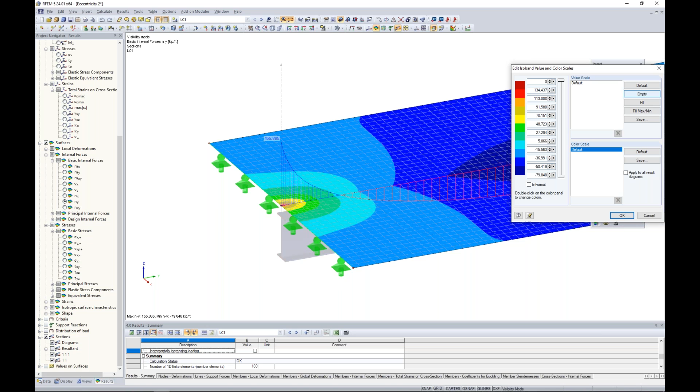In our control panel, maybe we completely take out tension and adjust this control panel to only look at the compression forces. It's really as we'd expect - we want this slab element to take those compression forces from the applied area load.

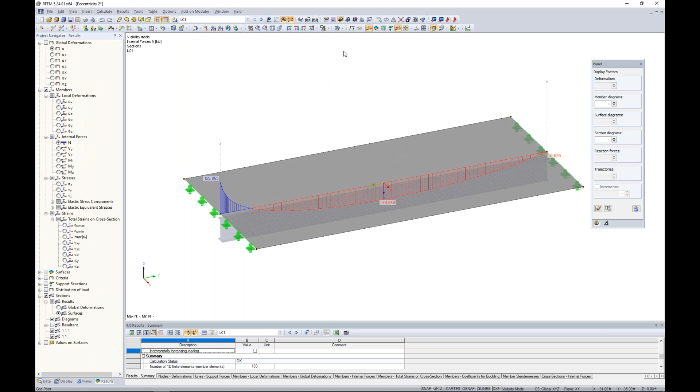In turn, if we turn off our surfaces, let's take a look at our members. We're most interested in the axial force of the member. Looking at my system up here, I don't have a single axial load within this member at all, so it's not taking any of the tension.

So let us jump to our last example today, which will be somewhat related to this composite behavior. This time we have a CLT deck - that's cross-laminated timber. I've utilized my add-on module RF Laminate to define the various layers within this floor.

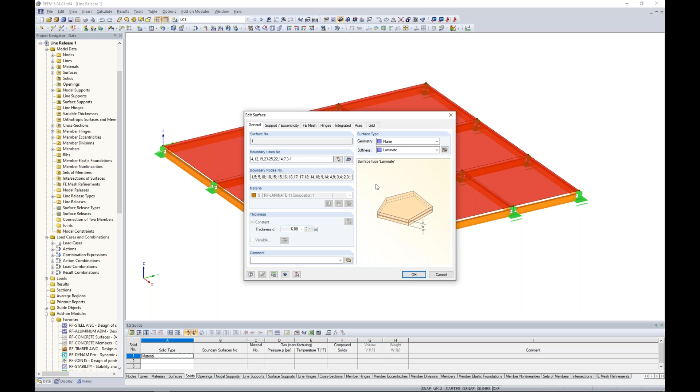Below it, I have my glulam members, and I've applied this eccentricity because I want this deck sitting on top of these glulam members. You can see on either end I've also applied some member hinges - I've released torsion on one side, and released moment on both sides.

What you'll notice is that we're ultimately trying to gain composite behavior design between these two elements. We have an applied load here of 0.5 kips per square foot, and we run our analysis. So what we want to do is quickly run this particular load case to look at our internal forces of the members.

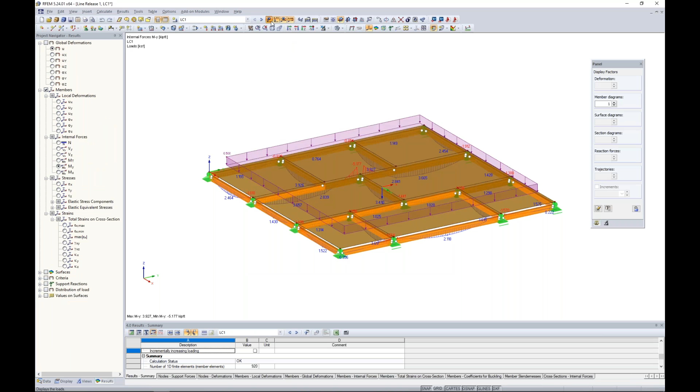When I take a look at torsion, we're seeing some pretty high torsion forces within the structure, and this definitely isn't ideal. Typically, when connecting the CLT floor to the beams below it, we use a screw type connection, and the screw releases the moment so we're not so concerned with torsion in our members.

The other thing is if we look at the bending moment, these are supposed to be simply supported member elements with pin end releases, and we have extremely high negative bending at one end. Now it eventually goes back to zero, but we definitely don't want to see such high negative bending either. The problem is that we've defined this composite type behavior and everything is rigidly connected, when in reality we want partially composite behavior because of the connection between the CLT floor and the glulam member.

So how can we take that into consideration? What we're going to utilize is what's called a line release. Over in my project navigator, I can right click and choose new graphically. The first thing to do is define my line release type, and you'll see here we have four degrees of freedom. The first thing I'm going to do is completely release that rotation about the line's local x-axis.

So it must be clear that these x, y, and z axes refer to the line element itself, not the member and not the surface, but I'm going to release that torsion along that line x-axis. Now in the translation directions x and y, let's assume we have some type of slip here for our screws connecting these two elements. So we would probably set this as something like 10 kips per square foot for our spring constant.

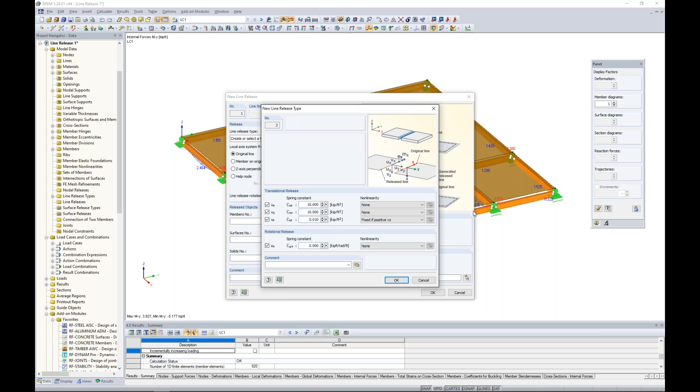So once we have created this line release type for all of these definitions between the member and the surface, I can click OK. I'm going to release surface number 1. When I click OK, I have the ability here just to highlight over the entire member. And what you'll see now is this symbol, which represents the line release, connecting all of these glulam members to my CLT panel.

So I rerun this calculation, and hopefully we'll see a little bit of a difference here with our results. Notice it's going to take just a split second longer because we've introduced this nonlinear behavior with these line releases. But we take a look at our torsion, well, it might still look like we have some torsion, but these are pretty small values, 0.04, 0.1. This is much, much lower than what we were seeing before because we've now released that behavior between those two elements. If we take a look at our strong axis bending, we're no longer seeing those high peak negative bending forces either, which is exactly as you'd expect here. We have positive bending for all of our member elements. So some of these nonlinear applications can further be used in the program to really get the desired behavior that we want.

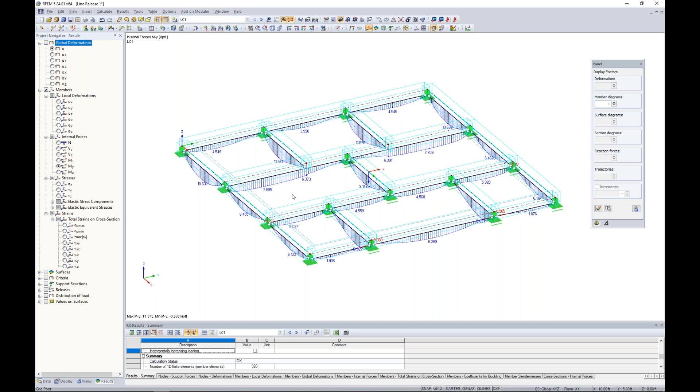Okay, so that will conclude all of our examples today. And I know that was quite a bit of information. We went through many models.